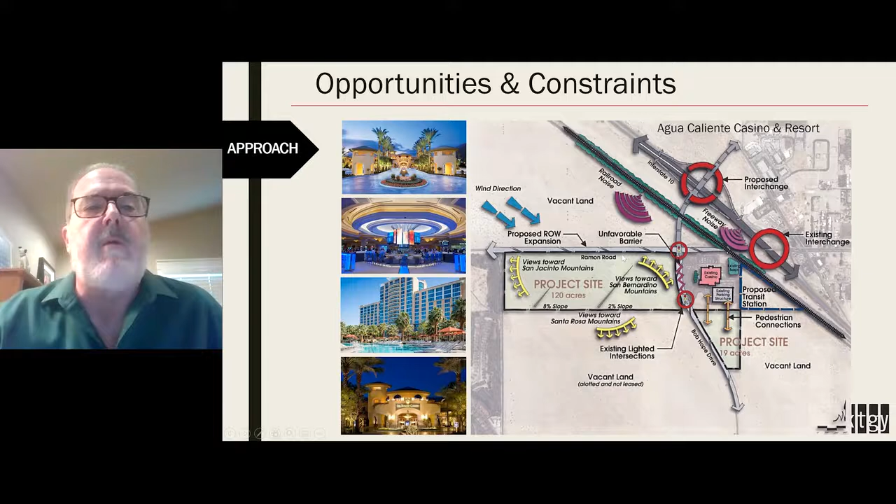So that's important to take into consideration as well, not just your own internal personal beliefs about what should occur, but who you're designing the project for.

From a design perspective, no matter how big or small your project is, we like to incorporate a sense of containment. Think about diversity of human activity, of quiet spaces, of more busy areas, of historic continuity. It doesn't have to be bold, sometimes that's appropriate, but there are subtle ways to tap into what's been there before. I think Native American lands offer perhaps the greatest opportunity to do that. Think about human scale and locational considerations. Those are all fundamental design criteria that add value to your projects.

I'll give you one example. We worked on a project up in the San Fernando Valley area called Porter Ranch Town Center. When we first started evaluating that property, it was in an area that had a lot of wildlife. Years ago, there were movies made there with Lucille Ball and others. We weren't necessarily going to have pictures of Lucille Ball in the town center, but there was some history of time gone by in this area.

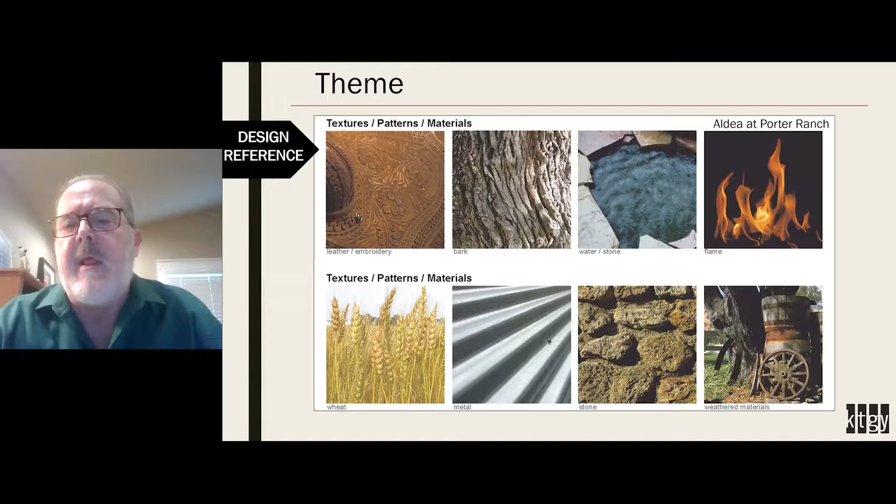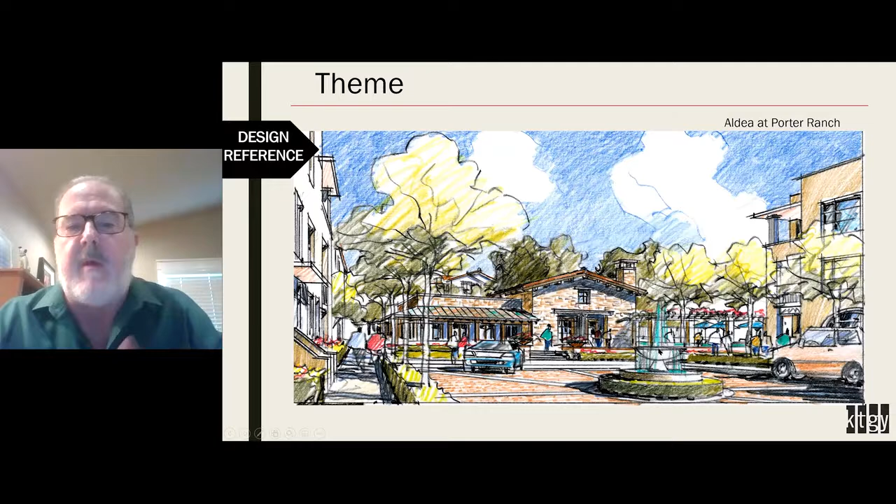It also had very strong landforms and vegetation. So what that developed into, for our recommendations, was a color palette that felt connected to the place, and a use of materials, whether leather, stone, water, or fire, that related to the authenticity of the site itself. At the end of the day, this is a residential and retail project. We used those colors and materials, and one of the big ideas was to do a new building that looked old, like it had been there for a very long time. That's actually the community center that got built as part of the project.

We did the same thing for the Platte River, up outside of Casper, Wyoming. Most people today think of it as the area where all the oil refinery took place. You see these old pictures that were here. But the strength of this project is the fact that it's on the river, the Platte River, in this location.

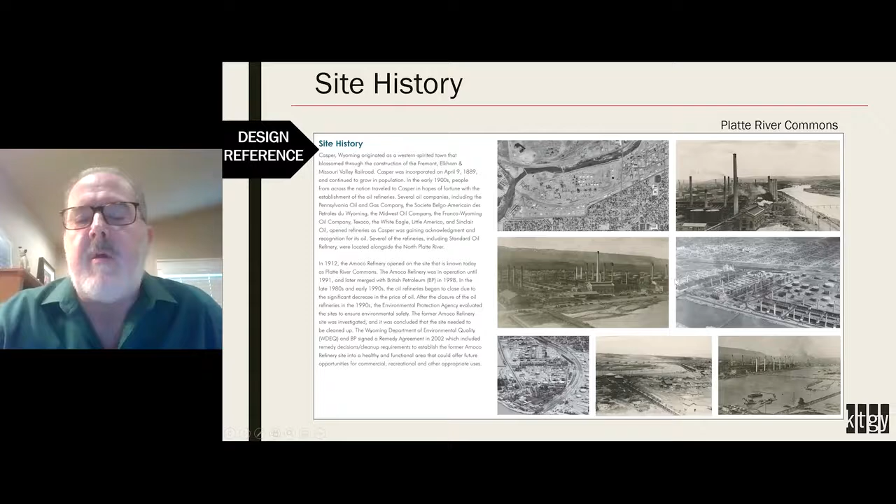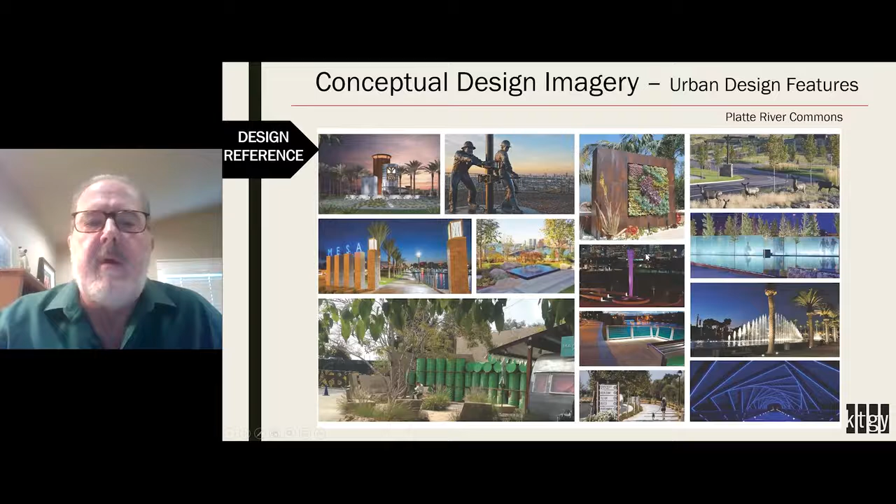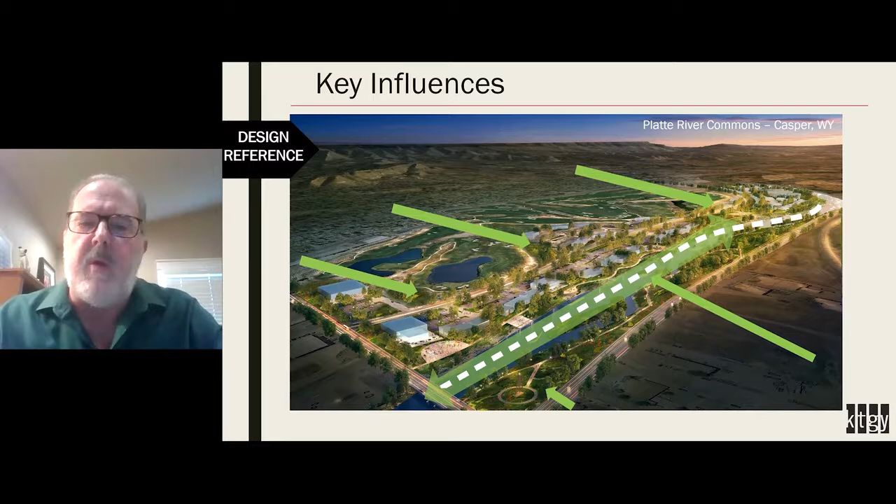We like to use some fairly simple graphics, whether this is the Platte River project, golf course, retail, residential, or hotel. Every project, as you start moving forward with small implementation of this plan, should have some connection to the river, physical and visual connections. This diagram might be hard to understand, so what do you really mean? Well, we've done some renderings to show that. So when the retail center moves forward, you've got an edge condition next to that river that celebrates it.

We worked a couple of years ago for the Morongos, who have several thousand acres. They have the benefit of a 10 freeway right here with a gazillion cars on it, but nonetheless, large land holding north of the 10 freeway. We started to develop some recommendations for uses, but also big picture, even relating to land that's not theirs. On the south, the county of Riverside is moving forward with residential uses. How can we plan for the Morongos to take advantage of what's going to be developed next door down the road?

That translated to a master plan that, based on market input as well as all the other areas of technical expertise, developed a resort district where there's an existing casino, very successful, that the Morongos have right now, but a framework plan, a vision if you will, for future resort uses to be designed and developed around that casino. So an RV park and some flexible spaces that would allow for hotel or other uses that would complement the resort itself. Then further to the east, not competing with that but complementing it, a travel center and logistics and other uses that made sense further to the east.

This we also developed a little bit further. You see down in the corner here, this is the existing casino. We allowed for the appropriate area for future expansion, with a roadway and vision framework that would allow for a hotel or RV park to be included in the future as part of their objectives.

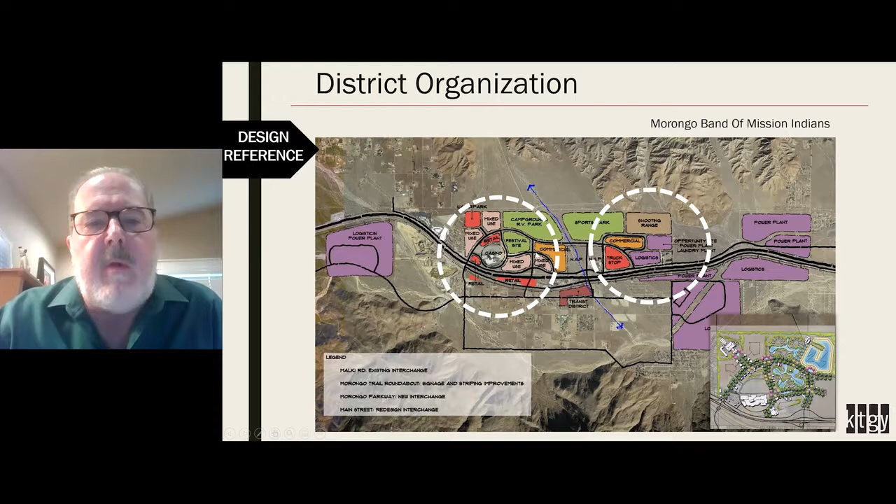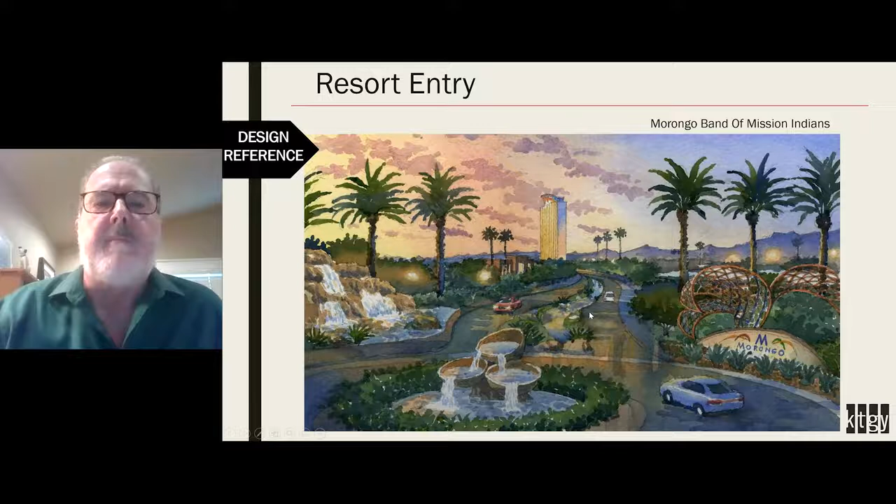We made a recommendation that over time, as these other areas get developed, there's a framework in place. This next rendering is looking back towards the casino, showing a strong resort entry into the project looking back to the west. It doesn't have to be detailed architecture, but it allows people to understand what that vision might be.

Okay, you might be asking, what if all I want to do is build a convenience store or a gas station? That master plan's great, but I need to move forward with the tribe's priority, or a community center, whatever that may be right now that's your focus. We think the approach is the same.

The big question, and this is the fun part about our business and working with Shane and the team, is how much is enough? You don't have to do all the same amount for each one of these. It takes homework up front to understand what we probably should do in order to help make the tribe make informed decisions.

I think there are four things to remember relative to that. One, be relevant to the site. This picture on the right is our master plan we did in the city of Brea.

It's called the Hartley Center. This beautiful plaza you see here was actually a great lawn, and everyone knew the Hartley Center was going to get redeveloped. It was the old place where Unocal studied deep sea oil exploration, et cetera, but that corner was very special.

So as part of the development for retail and residential uses, et cetera, we created a public space there. It's a plaza that the retail looks onto. So the relevance here is the corner is still important.

This is actually an art in public places piece that is sort of abstract - you probably have to have an adult beverage or two - but this is an abstract oil derrick. They kind of move up and down when the wind blows.

The second is to be timeless. In our business, our designers and planners think we've got the greatest new idea, but many of those ideas, if you go back to timeless planning principles, are just that - timeless planning principles. So do things that you know are going to last over time.

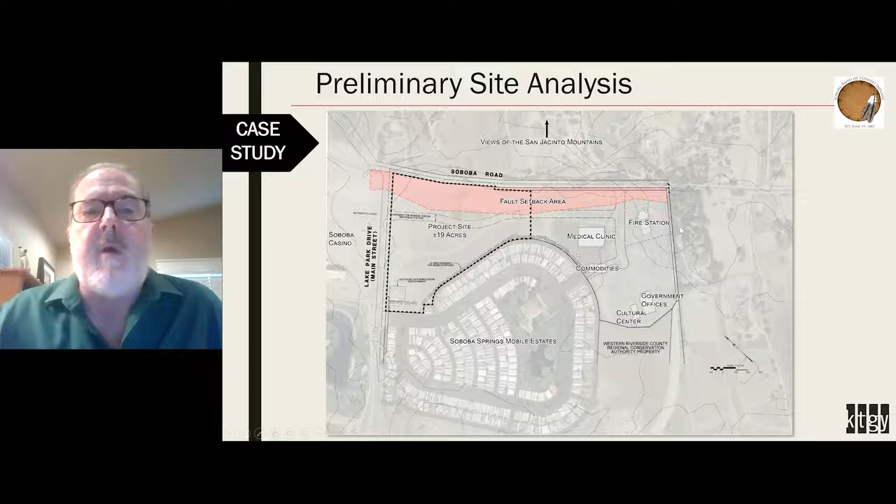We were asked to look at it to see if we could move forward with retail uses on this site that would complement everything else the tribe had been working on. We were also given a very short time frame to come up with a concept, and we hope to share this with you today.

Knowing we didn't have a long time, we used several different techniques to gain consensus. I know most of you listening don't have any tribal politics at all—I think most attendees are staff members, and every session I've gone to, people say they never have any tribal politics. If we were live, I think I'd hear some chuckles right now. We know there are different opinions, and you need to work to gain consensus.

In this case, we used multiple techniques. We had an all-day design charrette where we invited different representatives of the tribe, whether from the casino side, tribal council members, or the economic development board we worked with. We also did some verbal discussions.

Jeff Graney, my design director, developed a board exploring opportunities in land use and concerns. We got together that first day, and before we even talked, I asked everyone to write down on a piece of paper the one thing they would want to take away—you didn't even have to put your name on it—something that would be important to the property.

We used a number of other techniques too. We had images for streetscapes and entry monumentation. Actually, this image here was something that a majority of the tribe really loved.

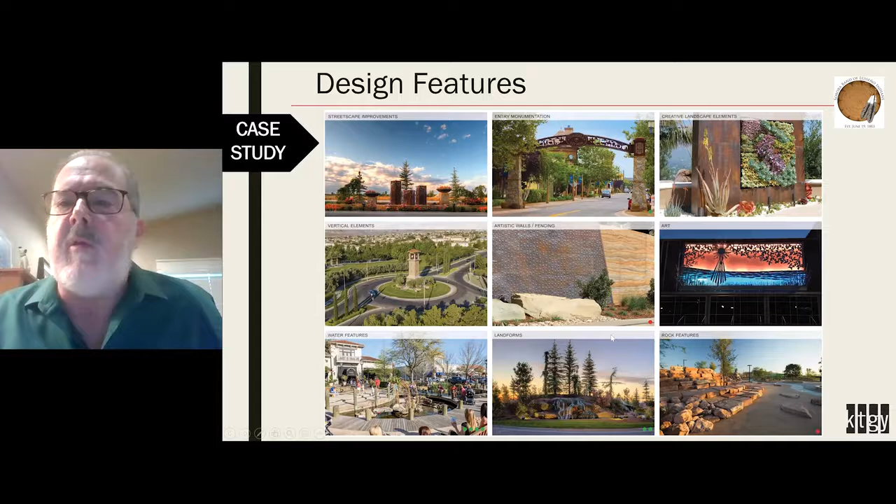Creative landscape elements—this is a suggestion for those of you listening too. We used green dots and red dots; you don't have to put your name to it. Just go up, put green dots on the images you like, red dots on the images you don't care for.

We did the same thing for landscape. Should it be formal? Should it be organic? What images do you like? It helped shape direction for the plan.

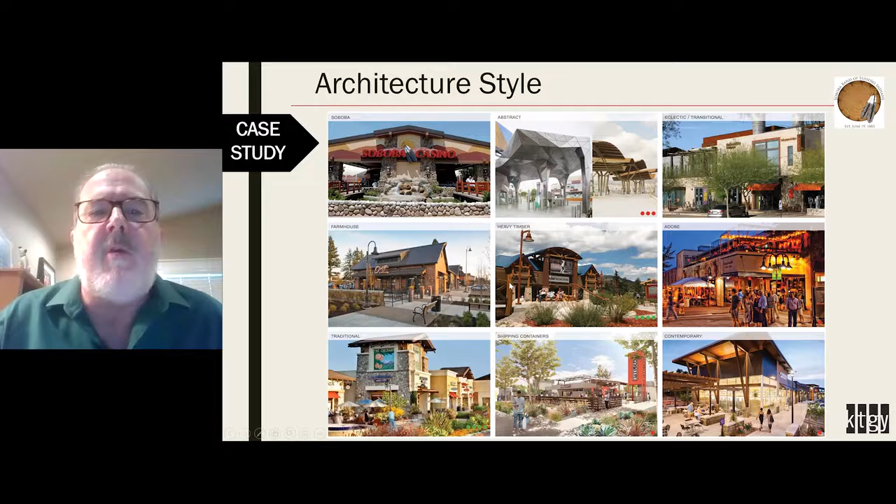We did the same thing for architecture. Universally, the Sobobas, because of the setting and perhaps the fire station that got built, they like the heavy timber look. So it helped shape direction for us, as well as the use of some stone material. We also used a technique that, for those of you who've participated in our workshops for NTLA, I love to do.

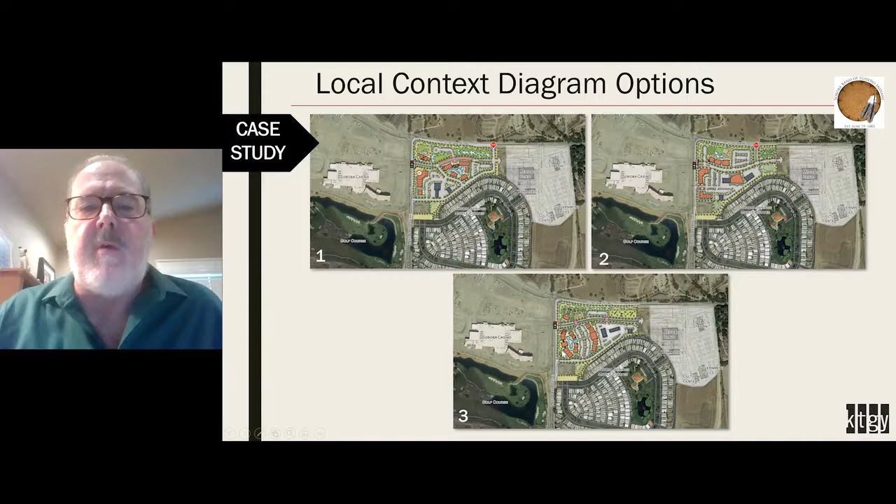As a result of all of that, in a fairly condensed process, we developed 3 design solutions for the overall master plan. I'm not going to dwell on the pros and cons of each, but we tabulated the statistics and discussed them.

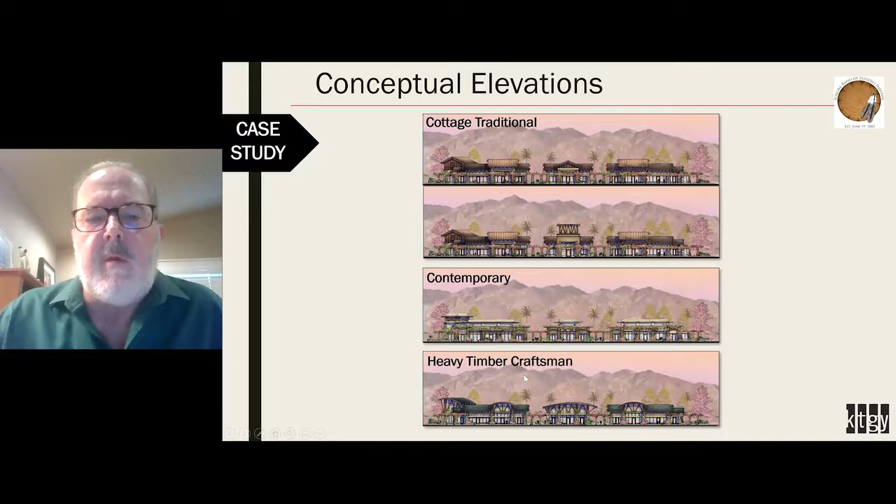We had several different options that responded to what we heard on the architecture. Ultimately, the heavy timber craftsman style is what the tribe selected. We then shared that with the overall shareholders for the tribe and got their input as well, and option 1 was selected very strongly, which helped guide us as designers on the direction the tribe wanted to pursue.

So this was option 1 that we selected to move forward with: a gateway opportunity. In this area, a convenience store, gas station, and car wash.

We had a full team on board helping with this project: Boyd Martin from a marketing perspective, C2 our landscape architect, ERSC our project civil engineer, John Kane doing traffic, W. O'Neill doing the general contracting, my partners David Obitz on initial architecture, and Michael Seng our retail architect.

We had a team pulled together that told us that if you do this correctly, over time retail could occur here, maybe not day one.

Along that earthquake fault—children, youth, and families are very important to the Soboba tribe—so we came up with recommendations for this area where you can't build, to create an opportunity for a kids' area and a farmers market, incorporating water since they have an agrarian history.

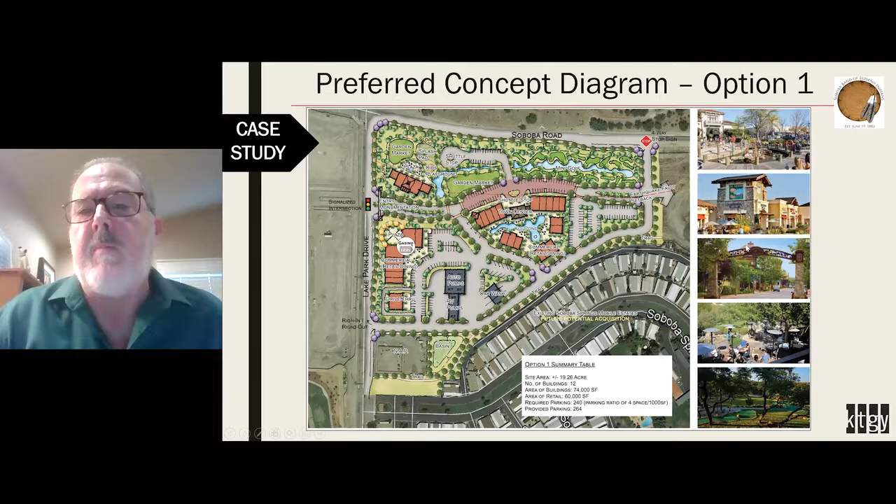It doesn't mean the project is going to get built exactly like this—Shane will talk about that—but as long as the overall vision is in place: a gateway opportunity coming into the tribal holdings, entry monumentation complementing what's going on across the street, that's the vision we developed, utilizing great input from the tribe on hardscape, softscape, et cetera.

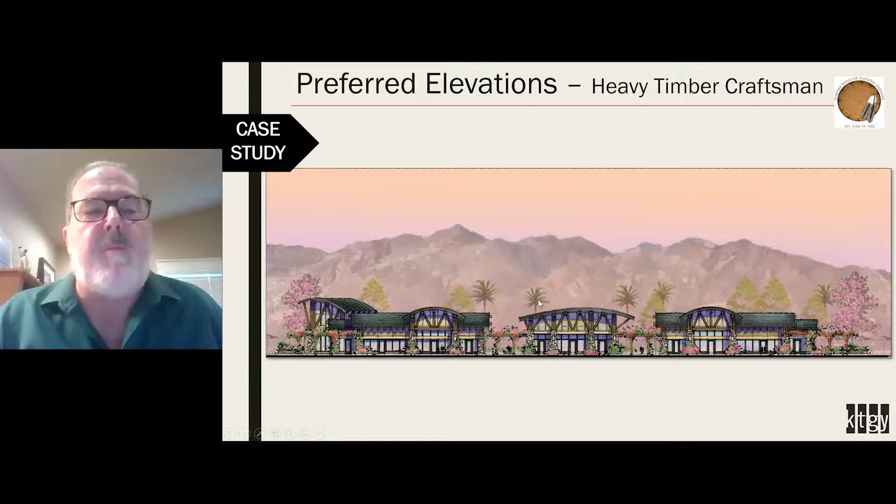This was the conceptual architecture, and you'll see the real architecture coming. Again, construction responds to that. We did an overall rendering showing how it could be developed over time, to give everybody a feel for what we were moving forward with.

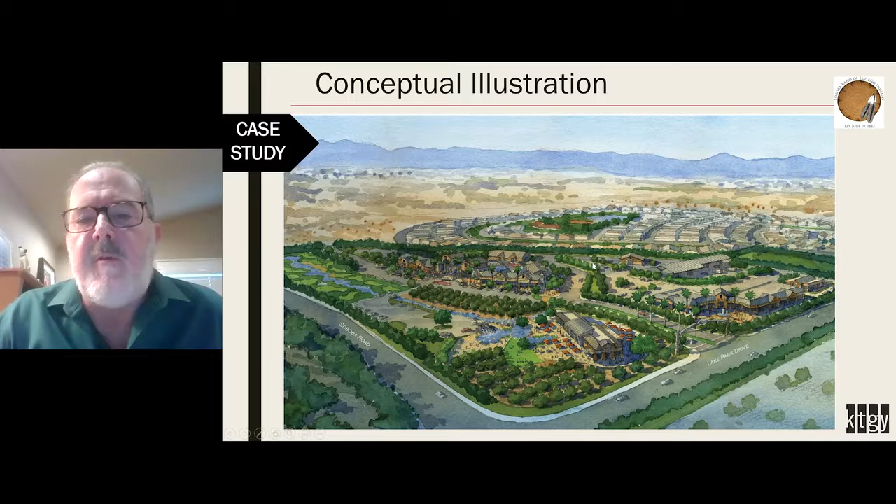This is the phase 1 area that we're going to talk about in a moment. Before we get into phase one, and before I have Shane jump in to talk about how he's been guiding us on this, we wanted to do enough work.

This is a very important gateway piece of property, so as we moved forward with engineering, grading, and architecture for phase one, we made sure that over time, when the tribe was ready to move forward with this area, it would actually reflect infrastructure opportunities and could get built.

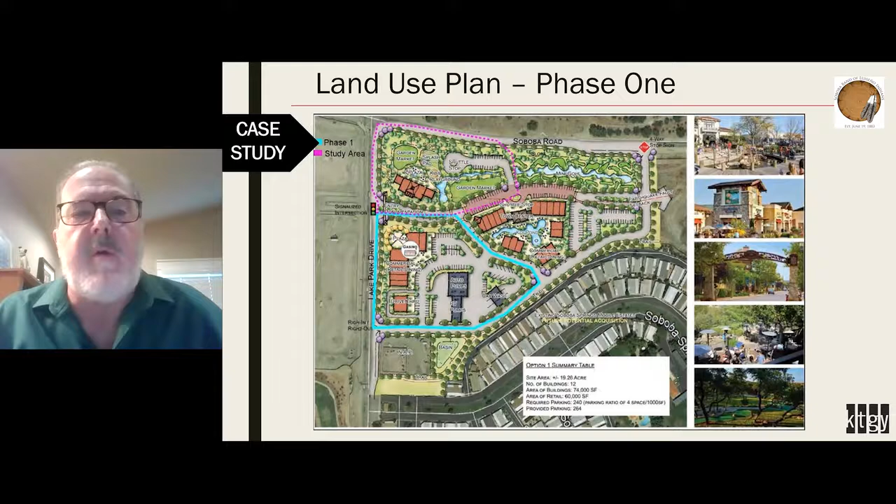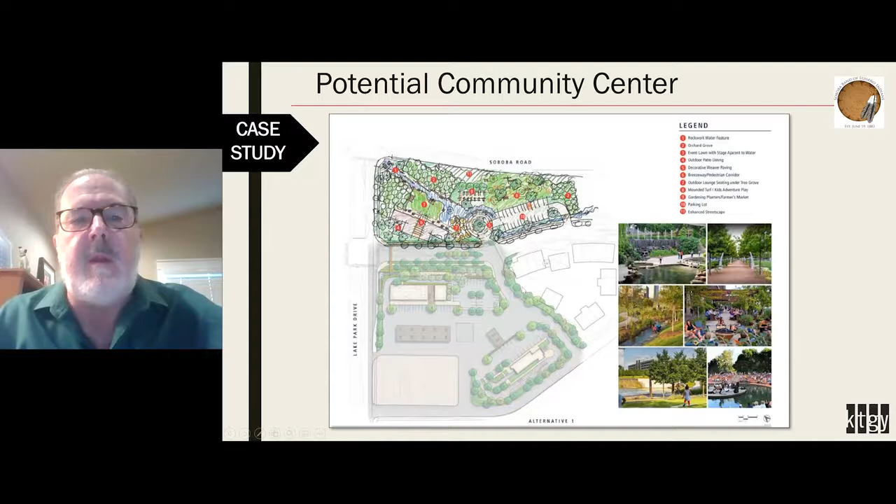So not engineering drawings, but we did some concepts to show where access should take place and where the building might be able to be located, and where those uses that the tribe shared with us that they'd like to have here could occur. Knowing that when you move forward with phase one, that could later get implemented in more detail.

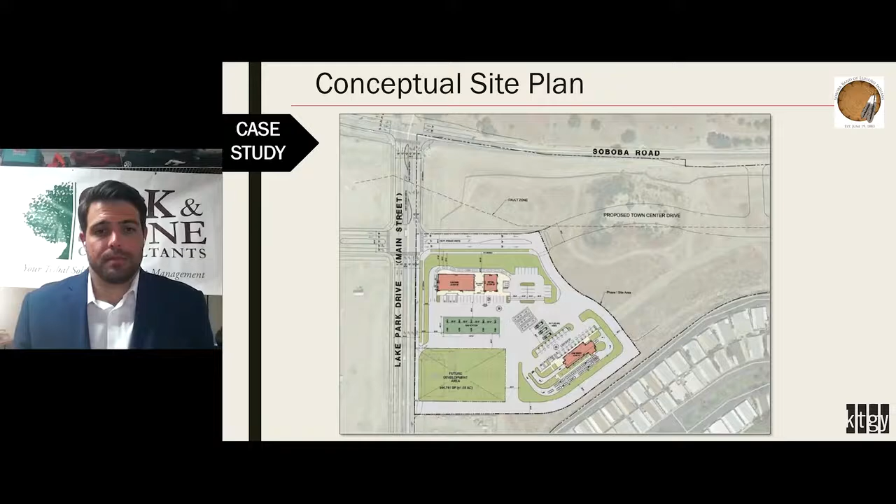And as we get into the case study, you'll see that as these business plans are done and all that work is done, you're set with a schedule and a budget. And we have to figure out a way with KTGY and the tribe, of course making decisions, how to implement that vision while also making our budget and our schedule.

And we can get into the case study, I guess, at this point, Ken.

Yeah, I probably should say too, one thing that really irritated me is that Shane's the guy that herds all these cats and he doesn't have any gray hair yet. I just don't know how he does it.

But the COVID-19 hit, and it had a major impact, because as all of you listening know, the casino was shut down for a while.

And so maybe the revenue stream that we had all planned on was changing. We were really pleased with the thoughtful approach - we think we armed the tribe with the ability to make informed decisions, and they did. The direction was set - this was what we were going to go forward and build.

Rather than value engineer all of it - that's always part of the process - we looked at the concepts. There are ways to save money, but don't lose the vision. The tribe made, I thought, a really fundamental, important decision: let's not compromise the design, but maybe we hold off. Instead of this being phase one, maybe this is phase 1A.

Let's do the convenience store and the gas station. Then phase 1B, when things stabilize, will be the car wash and the additional retail uses. That was the direction the tribe gave us to move forward with on this plan, and we looked at how we responded to it in our case study.

One other comment here - early on, because this earthquake fault was up here, this roadway intersection was really important to line up with the casino, but we wanted to shift the road a little bit more to the north. It's in an earthquake fault anyway, you can't build there, but this allows for a development parcel that made more sense and responded to our market folks, who said here's the square footage you could develop over time. So we have a better development parcel here.

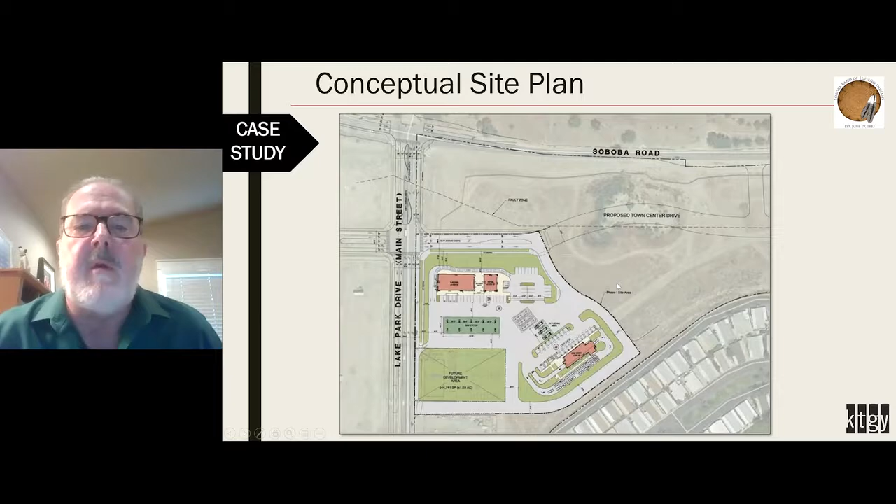That leads to some direction on the grading that became very important. Shane, you want to talk about this?

Thanks, Ken. That was a great point about phasing. When you look at your budget, we utilize our own resources and estimating, and we look at the market - we bid out the entire project of phase one, and we look at the car wash and future development and what we can or cannot do.

Instead of taking out things that would compromise the tribe's desired vision, we were able to see how it would make sense to reduce costs for the first phase - to take out the car wash and build it later, installing the infrastructure so it could be plugged in right away - and do the same with future retail, so we could just build the C-store right away.

We also took those things and backed them against the business plan - how did that affect revenue if the car wash wasn't involved? How did that affect traffic to the C-store if the car wash wasn't involved? And all these different things.

We were able to gather that data and also look at how the site looked with KTGY to make sure it didn't compromise the vision. We were able to make a decision: okay, phase one would be these items and phase two would be these items. So it was a great effort.

Then, looking at existing conditions, this project required a large civil and land development effort. We had to import a lot of dirt on this project - almost 200,000 cubic yards of dirt. Essentially, you're importing an island. That's an existing land development condition that really impacts your schedule and your budget.

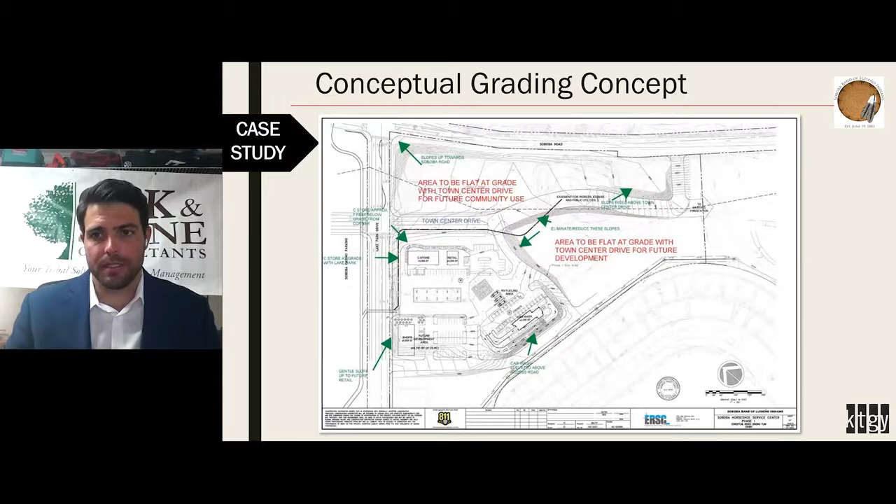It was very important that work was done when it was - we got everybody together and got that done in phase 1. Otherwise that storm drain water would have had nowhere to go unless you ripped apart the entire site. So we worked together with the engineers and KTGY and said, here are some bullets you may have to bite - here's your option if you don't do it, here's your option if you do. The tribe made a good decision, and the EDC made a good decision to move forward with that for their benefit and the tribe's.

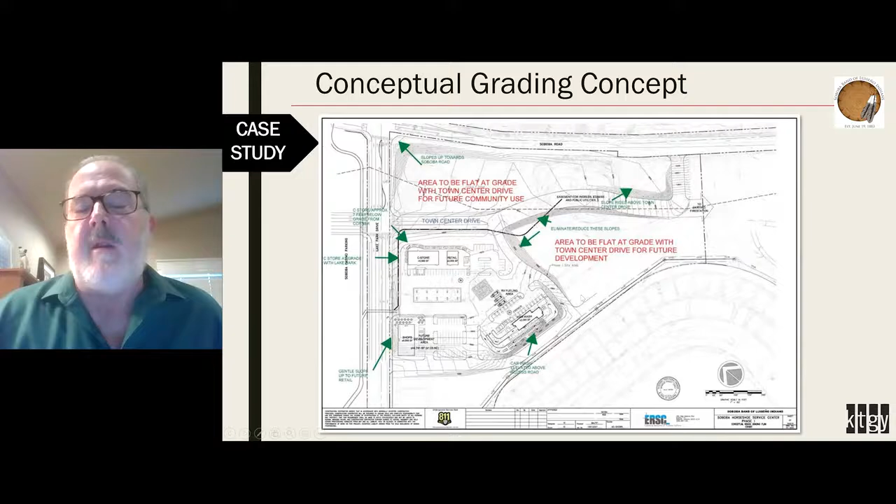I'm glad you mentioned it - that's a big point for those of you with infrastructure going on. It's worth having a vision in place. We were able to accommodate the drainage but bring it through the roadway and come through down here without compromising the overall vision. No one else will know, but we do - it's realigned in a different location that actually works for everybody.

Boy, we could spend the whole session talking about traffic. The short version is it was very important to make sure what we were doing honored the hotel and casino circulation, but also provided good access, as Shane indicated, to the C-store, and also for future planning to the east where the fire station is, for other uses that'll come later. We needed to widen the roadway and look at turning movements. It's a bit more complicated than normal because this roadway is also in the city of San Jacinto's jurisdiction, so we needed to plan what we wanted to do but also convince the city engineers that what we were doing made sense. We've been moving forward with that as part of the project.

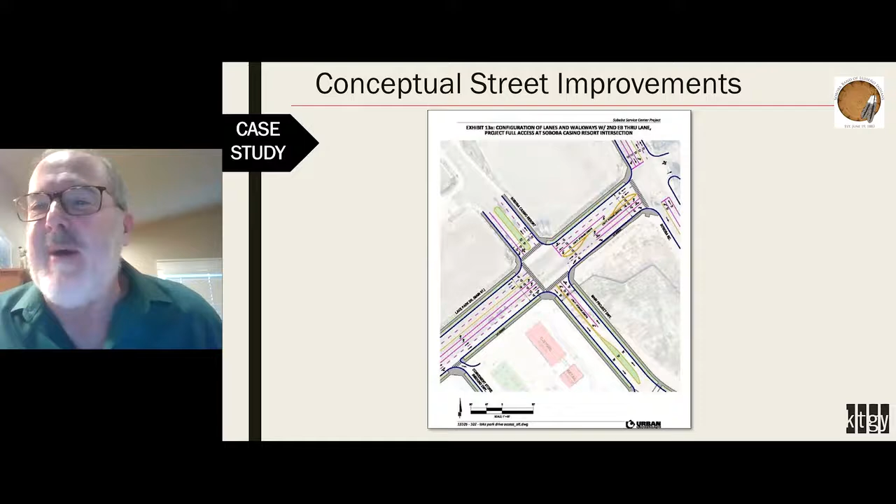What do you want to say about this graphic, Shane? It's just oversimplified about six months worth of work, probably. Generally speaking, this is another very large item that impacts the phasing of the project and the decisions made as to what goes into phase 1.

Right now at this intersection, there was no way for people leaving the casino to get to the convenience store and gas station. So a four-way intersection had to be made, and we were able to weigh the costs through bidding and getting actual costs, plus the business impacts of not doing that four-way intersection versus the cost savings and impacts of doing it. The impacts of doing the intersection and road work were much better than not doing it, even though we had to sacrifice something to phase 2, because getting that infrastructure done as established by KTGY's traffic study allowed us to make good decisions there.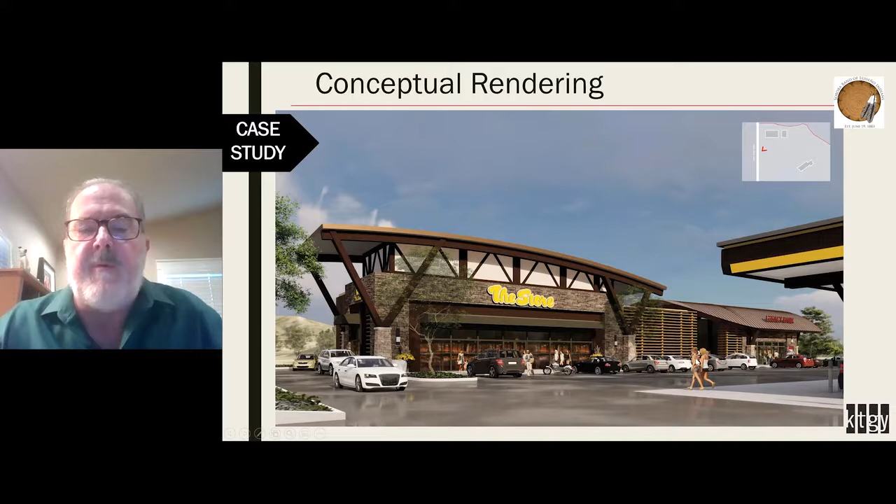I will say, it's one thing to look at a land plan. We're blessed these days with computer graphics that are fairly easy to generate, and I think the pictures are worth a thousand words. So we wanted to see not only what it looks like inside the site from the gas station area, but how the corner looks in terms of the drive-through, what materials we should utilize, and ways to make sure the vision gets implemented on this important corner while also being smart in terms of cost.

One thing I'll point out, this is a wave of the future right now. This is a convenience store drive-through, but rather than just a window to hand drinks back and forth, we've actually incorporated a door so you could walk and open someone's back seat and put groceries in.

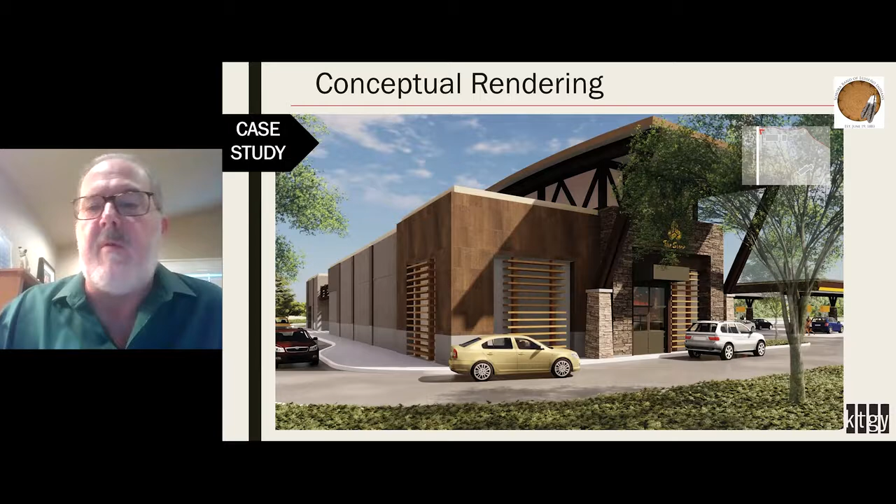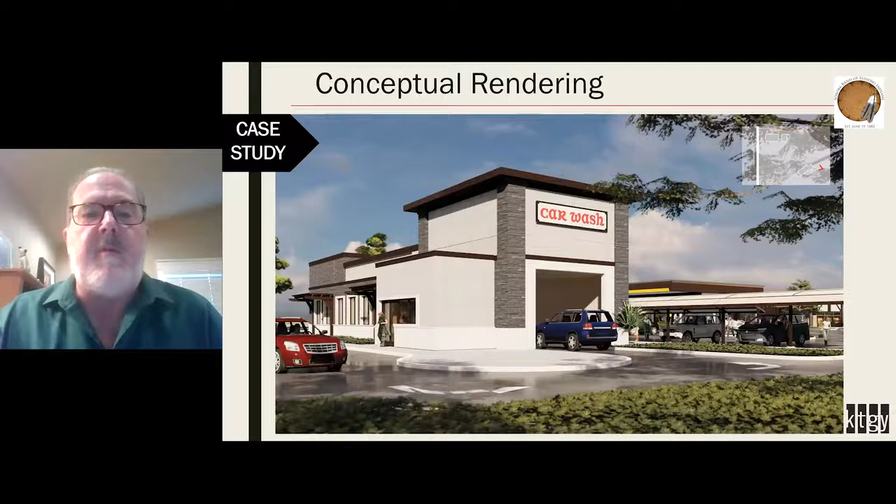We prepared the elevations for the second retail site, and we did the elevations for the car wash as well. None of this is wasted effort. When the tribe's ready to move forward with the car wash, we already have the color palette, materials, and vision identified for how those uses should move forward.

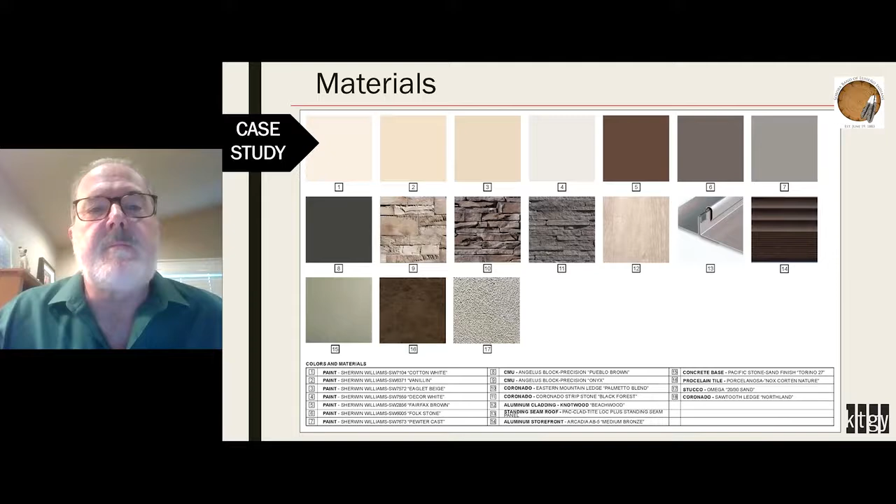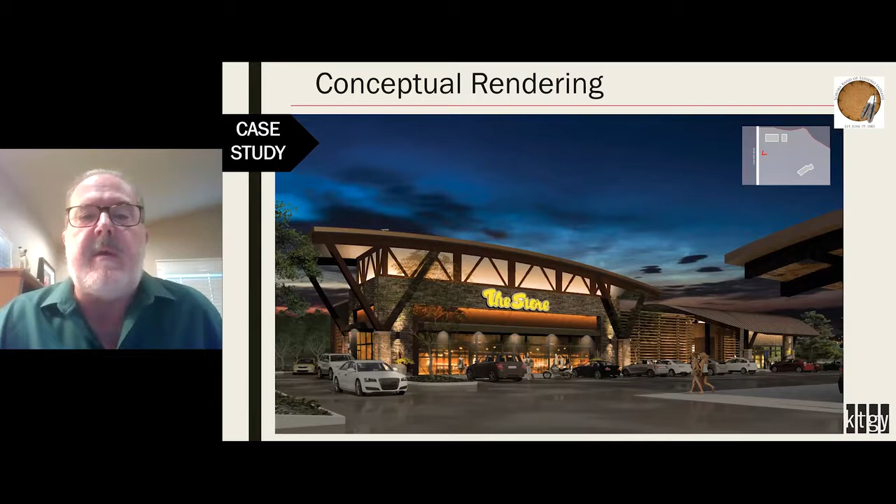We've done daytime and nighttime renderings, something also to keep in mind. Lighting is important for places. So how does it read and how does it feel at nighttime, in terms of creating place, safety, and security.

I wanted to share this as well, this is also an option. The C-store on the left is what's moving forward. We're getting ready to start construction on that. We've gone through schematics and CDs and are getting ready to build it. But the EDC decided to hold off on the additional retail site.

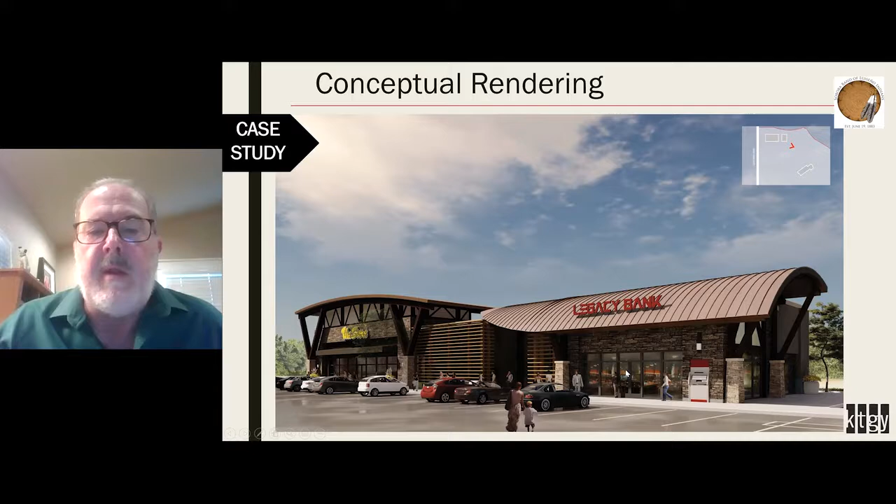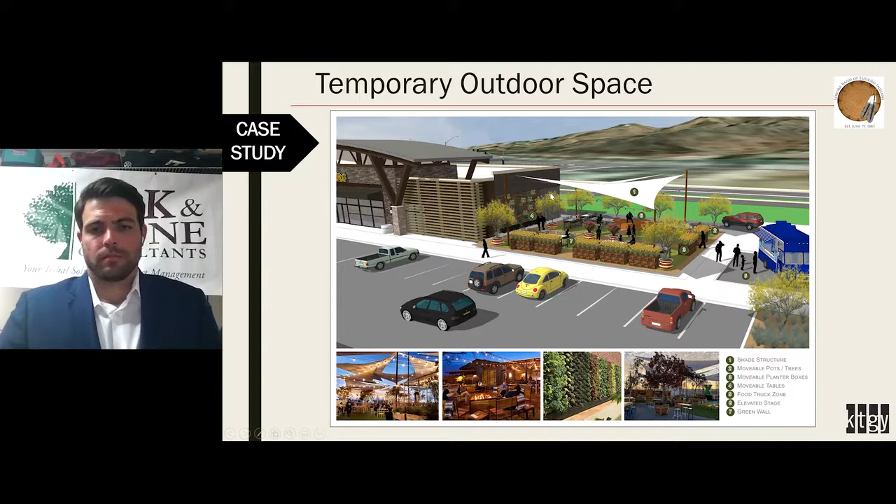So what do you do with that site in the interim? There are options. You can hydroseed it and put minimal landscaping so it looks okay. We also came up with an idea for outdoor space, a concept that with fairly nominal expenditure, some shade structures, a place where there might be some music, you could buy a sandwich and be outside. Maybe there's a food truck opportunity.

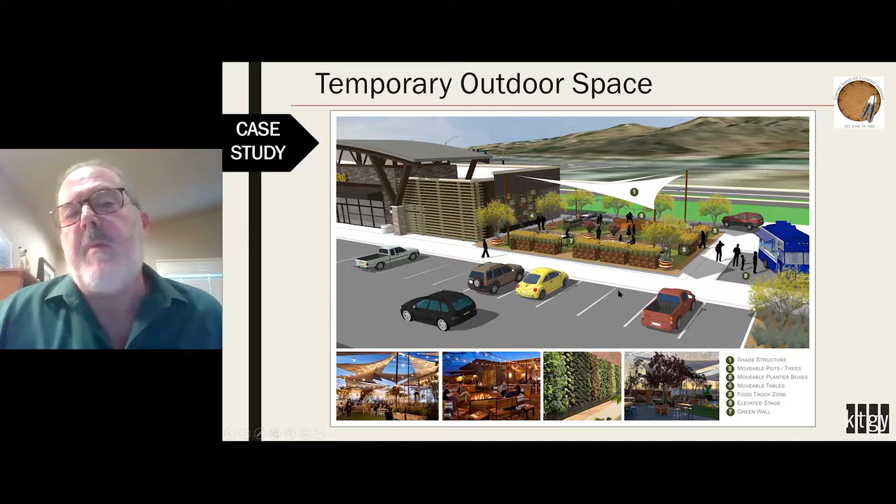We've done this in a couple of other places. These images below are from one of my other clients, Brewery X. This was actually a parking lot. Before COVID hit, they got shut down inside, so the question was: can we have people get together outside, far enough away that you don't even have to wear masks? There are also temporary uses in mind. In the case of Brewery X, they actually want to keep it forever now, but could you use that space next to the C-store for other purposes in the interim, rather than just a vacant lot?

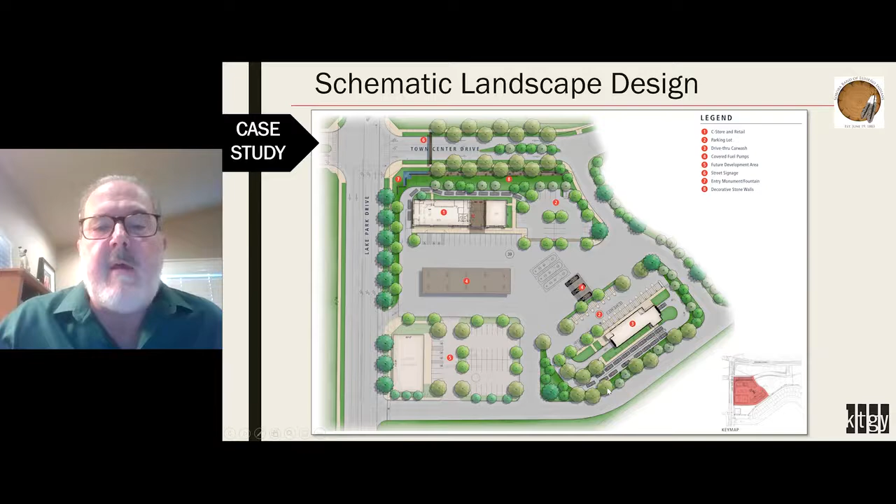So it's an option. We did the same thing with our landscape architect, C2 Collaborative West. They did a full landscape plan for what was originally the phase 1 area. We've now broken that down into phase 1A and phase 1B, so we asked them to do the same thing: landscape the corner, take care of the convenience store and fueling station, and do minimal landscaping elsewhere. It's not dirt, but we'll use hydroseed and flowers, so it's beautiful but allows for long-term development to take place later, without compromising the overall vision.

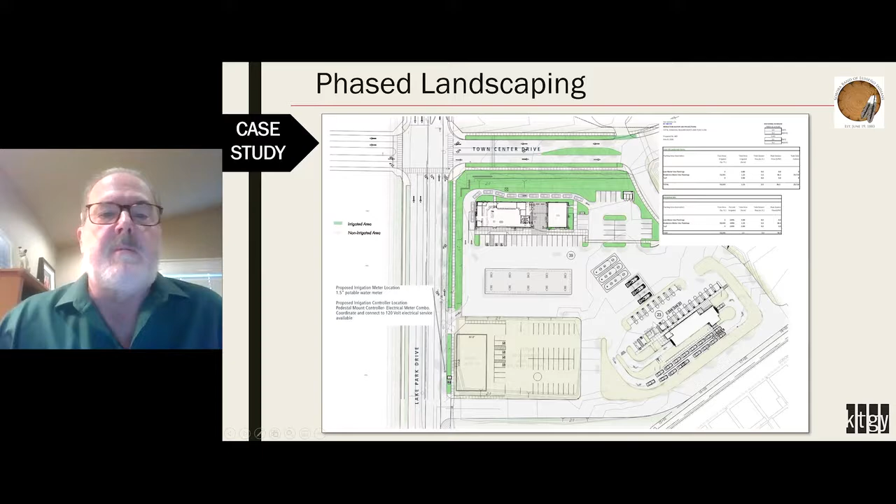We did the same thing working with Shane's group on the plant palette. What are the most important plants that need to be a certain size? Can we reduce that in certain areas? So that's gone through a full vetting too, implementing the vision while being cost effective.

Our main entry was very important to the tribe. Those early elements, even in our early workshop, this gateway element was something that was important as the overall site gets developed over time. This is the Lake Park Drive, casinos to the east. This is our main entry coming in, not just to the convenience store, but future development over time.

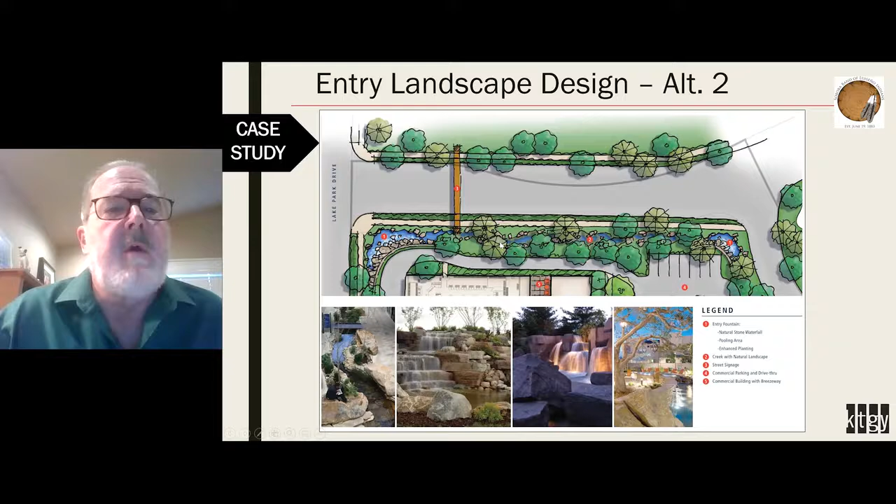Our second option was something more natural, a natural stream. We did some preliminary costing on all of these, and this one's a little bit more expensive. We did a third option that perhaps there's a fountain and more of an oasis concept. Through all of that discussion, the tribe selected the first one, which was more agrarian in its character.

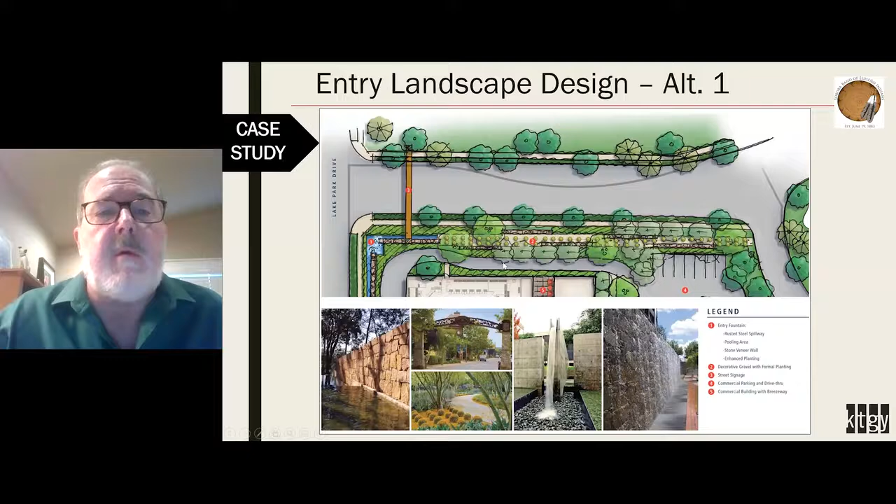So we developed that, this is sort of the concept development. We developed that further with sections, and in this case also, are there ways to maybe make the wall a little smaller? These are holding zones for the nomenclature for the village overall, but we developed sections so you can understand scale with people or cars driving by. How would that corner monument feel and look?

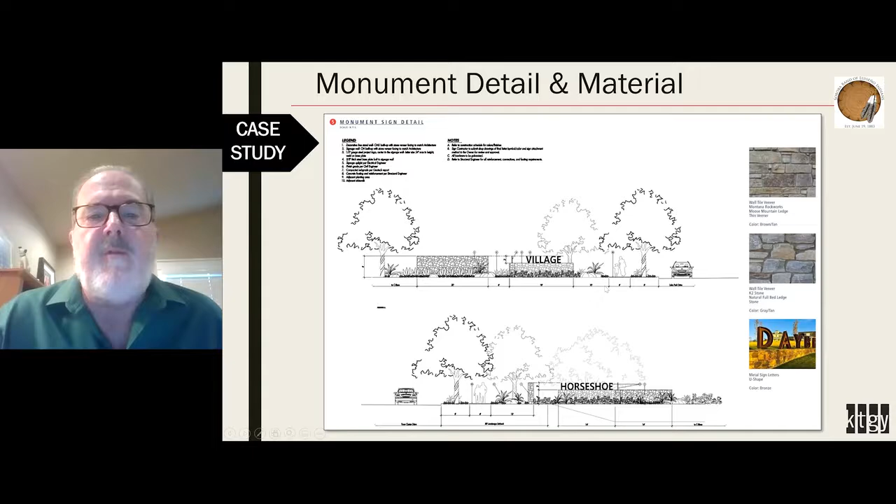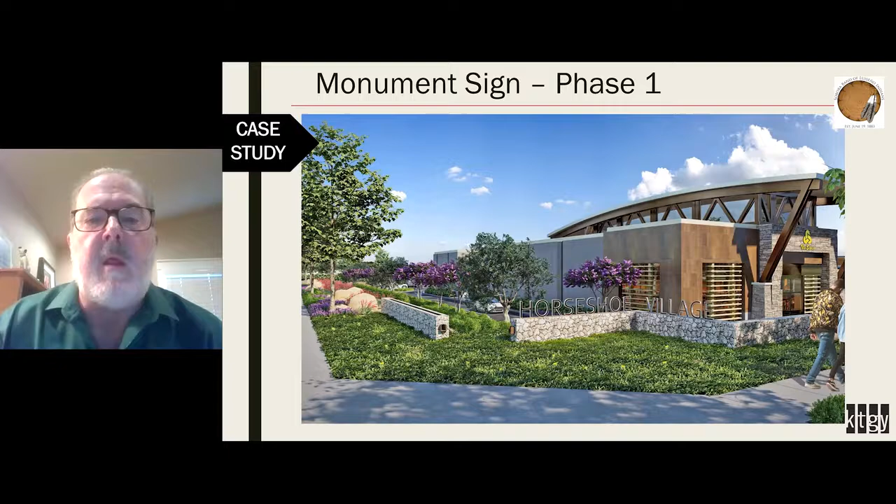We also designed it to be able to be phased over time. Plumb this with water, but phase one, the entry monument could be built like this, and then phase two you can add the water later as revenues support that design. So I think one of our messages today also is there's the ability to phase small design elements as well, to allow them to occur over time.

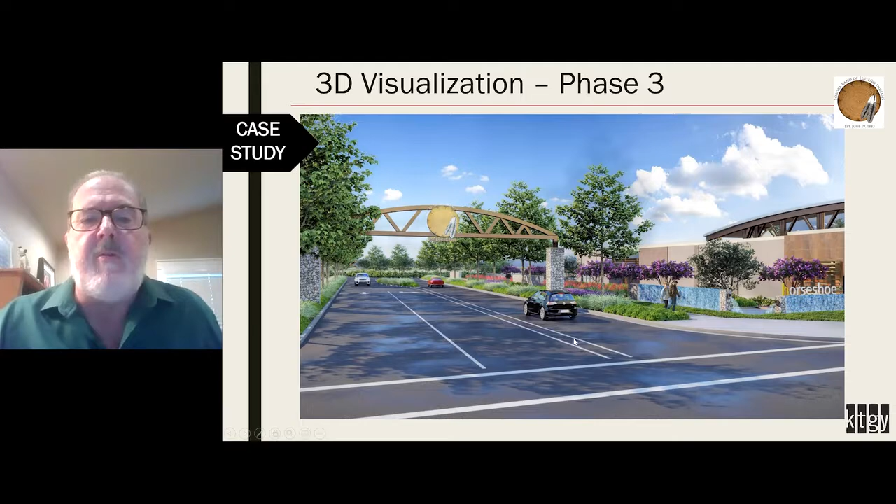The same is true with our gateway. This is that important gateway element, but can we move forward with the project now and do this later as the project develops? The answer is absolutely yes. And we developed a series of signage and materials and what that would look like when it gets built.

With C2, we developed an overall master signage concept for the overall site itself, with community monumentation, retail signage, the gas price signs, and directional signs. Then Shane asked us to look at what do we need to do for phase one, and we pared that down to the monument, retail, and directional signage.

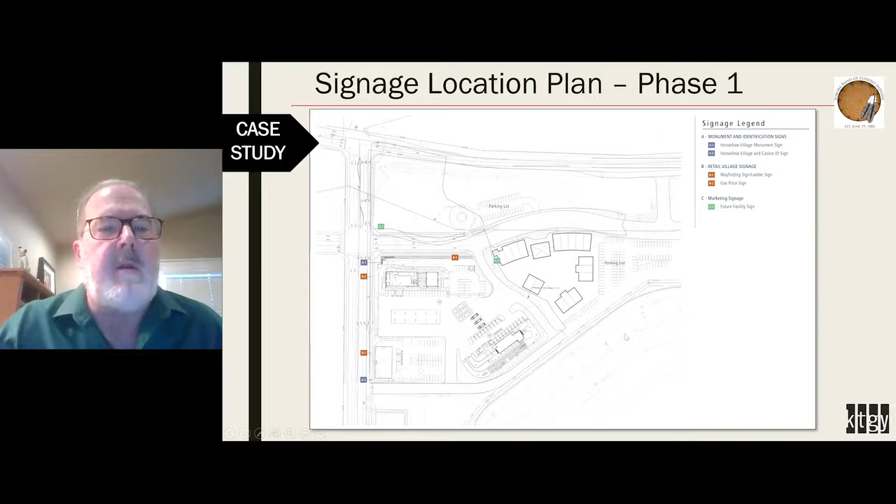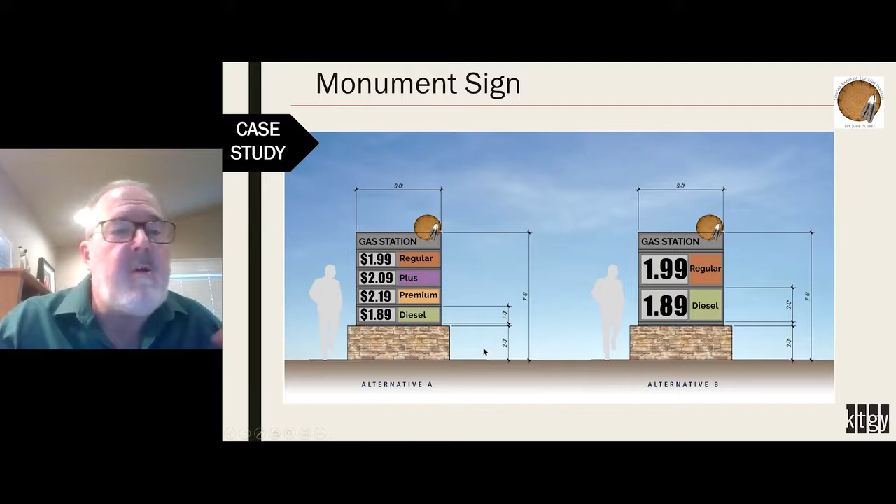We've even gone a step further in terms of moving forward with our convenience store and fueling station. Where should we go and where should the gas pricing signs be located? We've been working really closely with the team, and the EDC just recently selected to move forward with this gas station, gas pricing sign that has the materials, and where that could go so it fits into the bigger picture.

So we did some quick sketches about coming in the entry road to where that could be located, and we did some visuals exiting the casino. One of the things we were really pleased with, by elevating the site and having a grading concept that Shane had mentioned earlier of lifting this corner up, is that the striking architecture for the convenience store will in effect also be a sign.

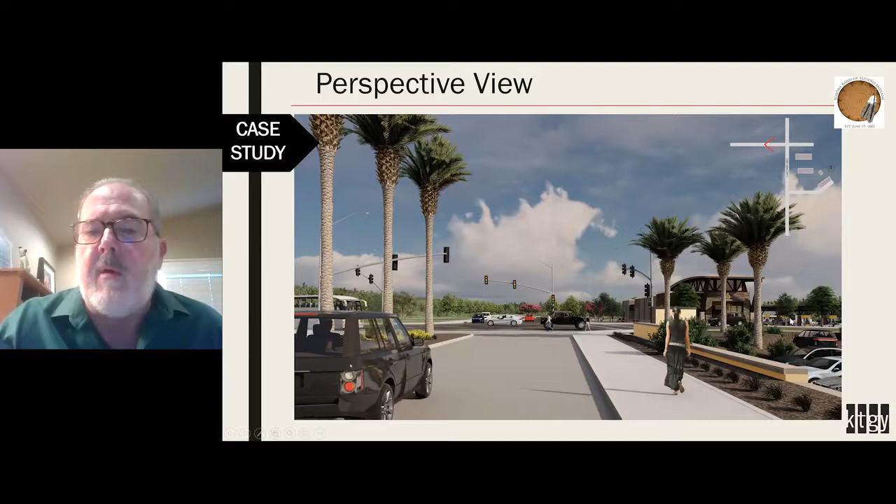You'll be able to brand this building at this location and then have an appropriate gas pricing sign at two locations. And this last exhibit, you don't have to redo every exhibit, you can talk it through when you visualize.

So we're coming north on Lake Park here. This is our future directional sign, we're probably not going to do that right now. But that gas pricing sign will be located down further in this location to let everyone know there's a gas station convenience store, and let everyone know that the vision is a strong one. There's some stone material associated with it, and these directionals and other signs can go in later and also be phased.

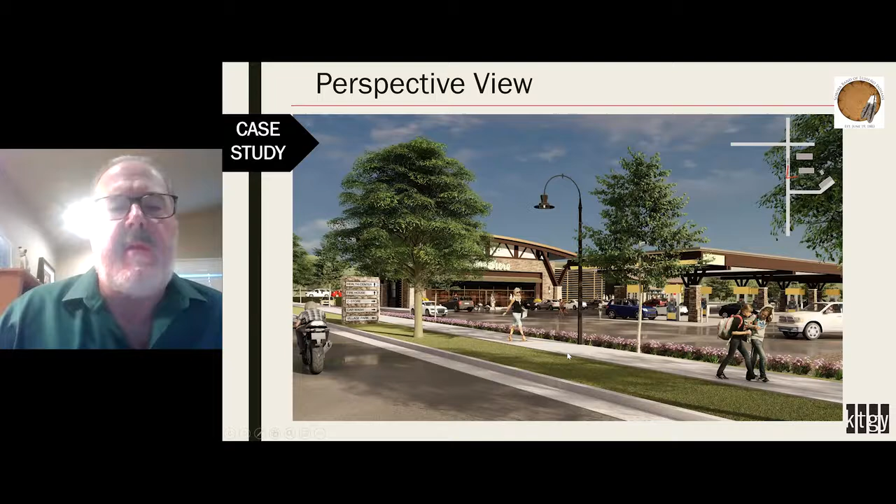So we've taken the same sort of strategy with our landscape architect. Now, I know in the past there has been quite a bit of really great questions. I think a couple of years ago, someone asked me how much would you charge me to do a community center in the middle of our presentation?